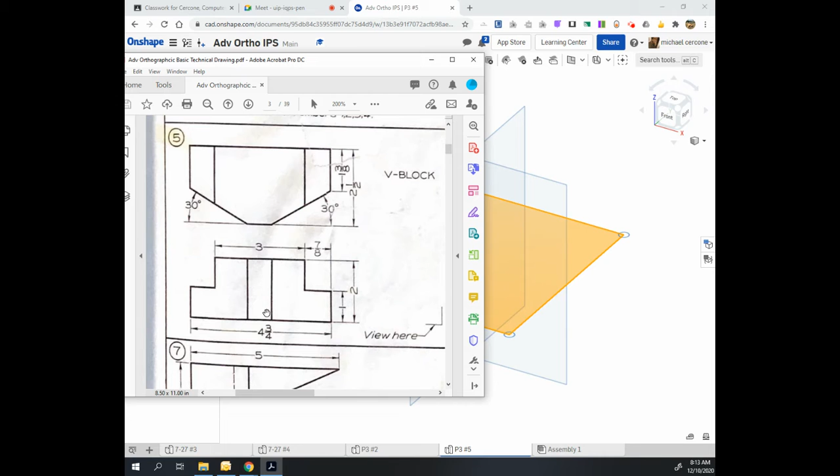So we have 2.5 here for the depth, the length 4 3/4, and a height of 2. So I'm going to start from the top, create a 2.5 by 4 3/4 and extrude up at 2.

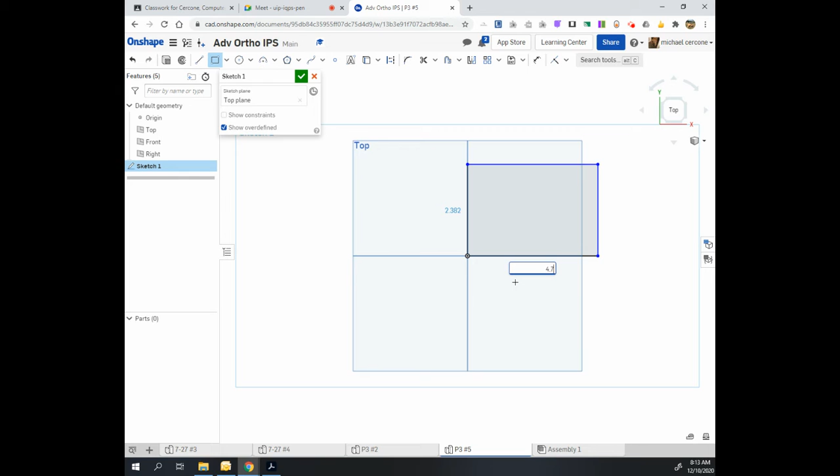So in my part here, I have my sketch. I'll go normal to, and I'm going to just draw a rectangle. Again, those dimensions for the length are 4 3/4, depth 2.5. So 4.75, 2.5, and then we will extrude this at a height of 2.

Press Shift 7 so I can see it in the isometric state. So now looking back at this, I can see that there's like these little steps here. There's also these 30-degree cutouts. So I need to figure out what to cut out. I'm going to go with the 30-degree cutouts.

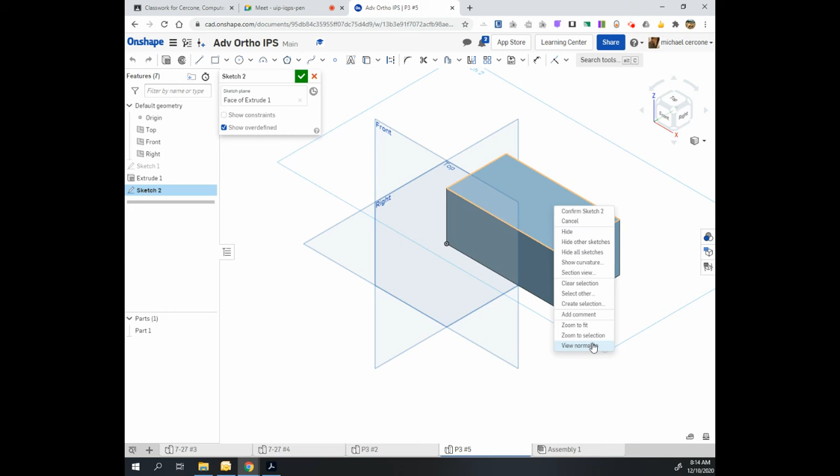I know they start from this edge in 1 3/8 and then goes 30 degrees. So 1 3/8 and 30. So I'll start my sketch here, and I'll draw a triangle.

I'll make one and then mirror it to the other side. So now I dimension this, from this edge in 1 plus 3 divided by 8. Angle 30. I need the same thing on the opposite side, so I'll use a construction line.

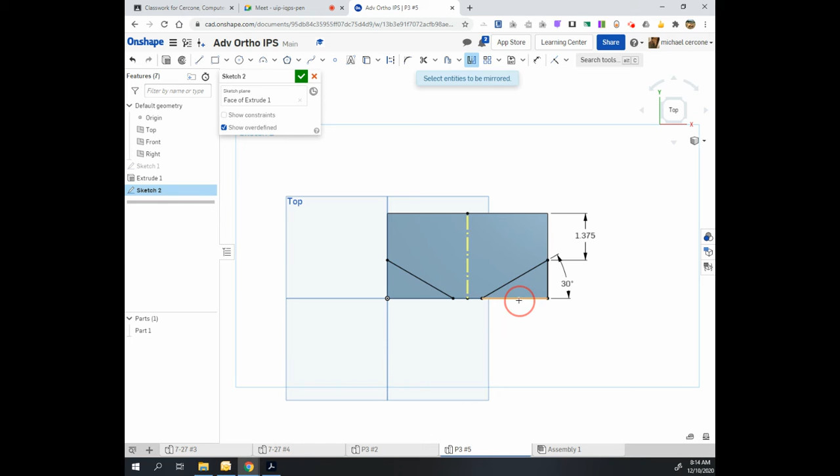And then I'll take this information and mirror. Oh, chose the wrong line. Choose my construction line, and these 3. Now I would extrude, remove, through all. So this is starting to look close to this.

Now I need to make these cutouts here. They're 7/8 wide. And from the base up, it's 1 inch, making it a cut of 1 inch.

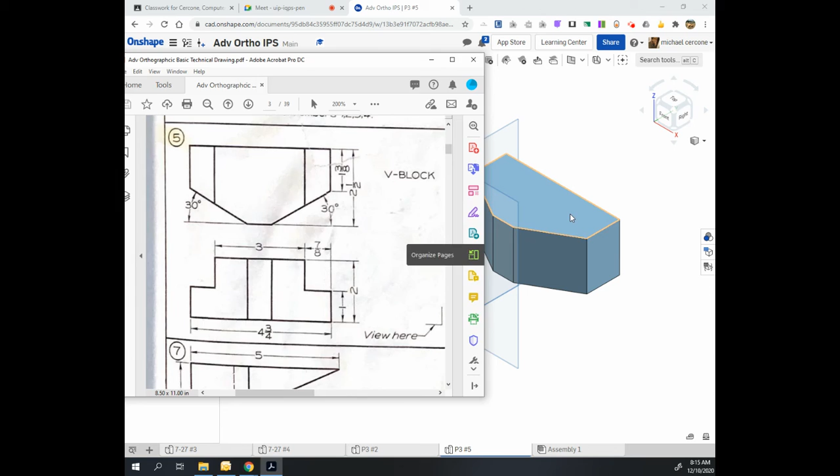So I'll start my sketch along the top. I could have done it from the back, from the side. I'm just choosing to go from the top. And I'm going to make this rectangle a little bit larger. Dimension it at 7/8.

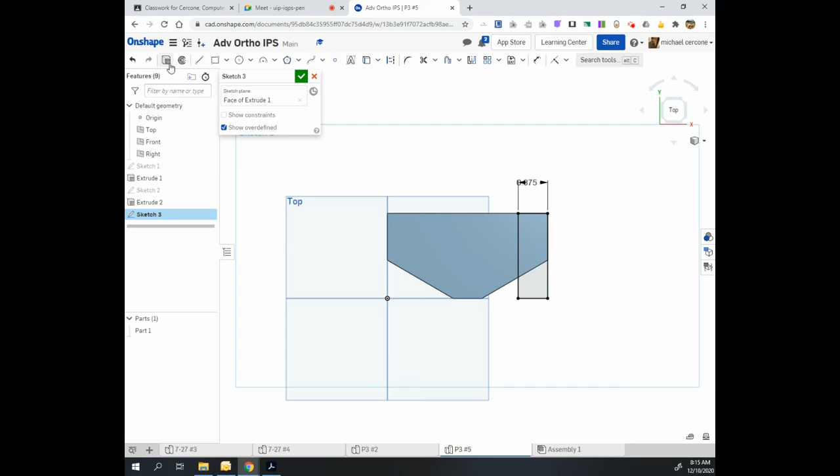This measurement doesn't really matter, but what I could do is select these 2 and then make them coincident so they're in line with one another. Now it's extrude or remove in 1 inch.

I want this information on the other side. I could draw the same exact thing, but to remind you guys how to make planes, I'm going to use a midplane and mirror this 3-dimensionally. So I select 1 edge, select the other, have my plane.

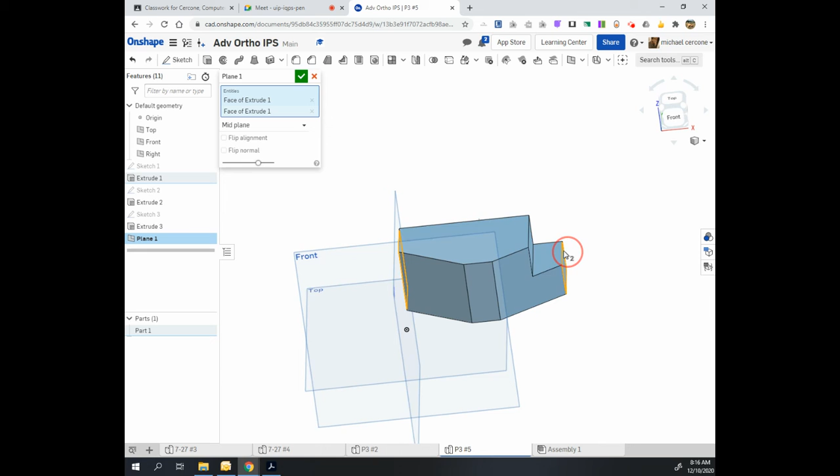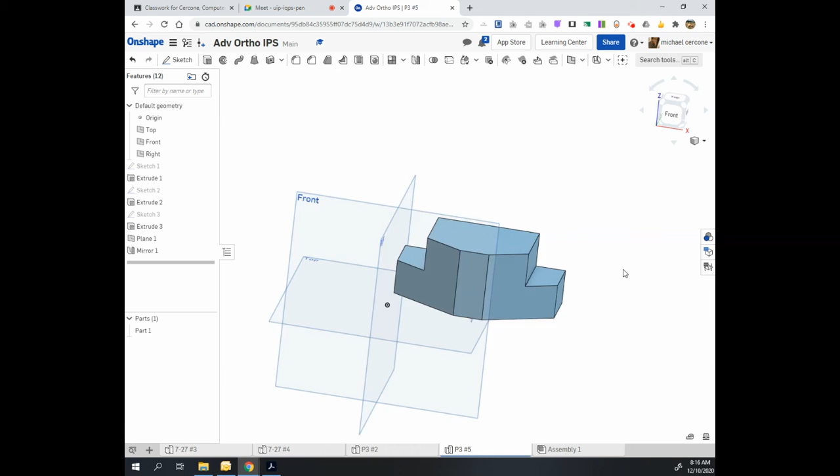Now I'm going to choose mirror. It is a feature mirror. The feature I want to mirror is extrude 3. My mirror plane is plane 1. And if I press Shift 5, this looks exactly like this. Shift 1.